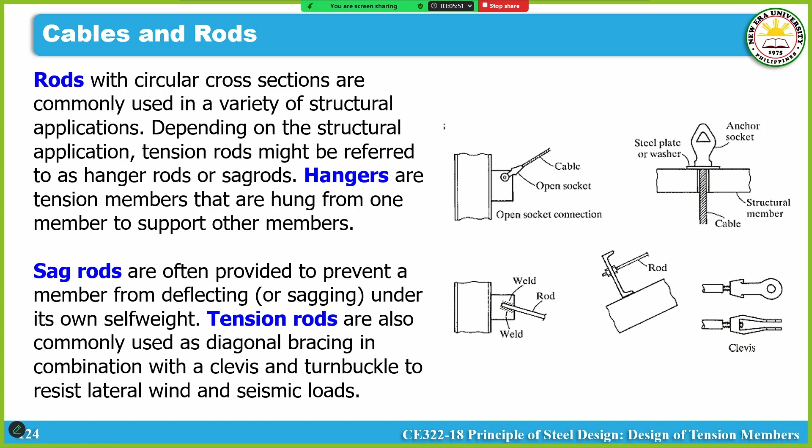And yung mga tension rods naman, usually in structures as additional diagonal bracing to provide additional lateral stiffness. Yan yung purpose ng mga tension rods. Okay? So paano ba siya di-design? As per code, design nominal capacity mo or strength.

Let me clarify. This is a nominal capacity: R sub n is equal to F sub n times A sub b. Wherein yung A sub b mo, this is just simply the area of your rods or cables. Gusto ko lang i-emphasize yung area na tinutukoy dito is the unthreaded area.

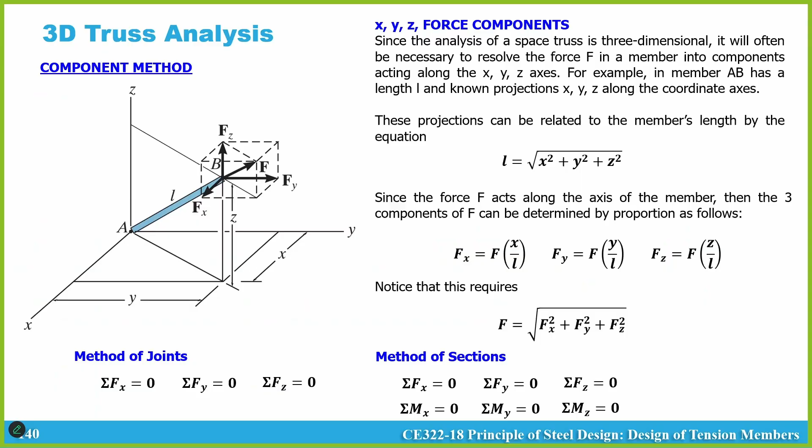Okay, last problem natin, problem number 6. Siguro dito I would simply use the direct calculation na lang kasi straightforward naman to. Although hindi siya truss member, the formula for the degree of indeterminacy applicable pa rin dito. So for 3D case, for trusses, we have DI equals r plus m minus 3j. So yan yung equation kapag 3D ka na. So might as well check if nasa determinate structure pa rin tayo. So DI natin kapag 3D is equal to r plus m minus 3j.

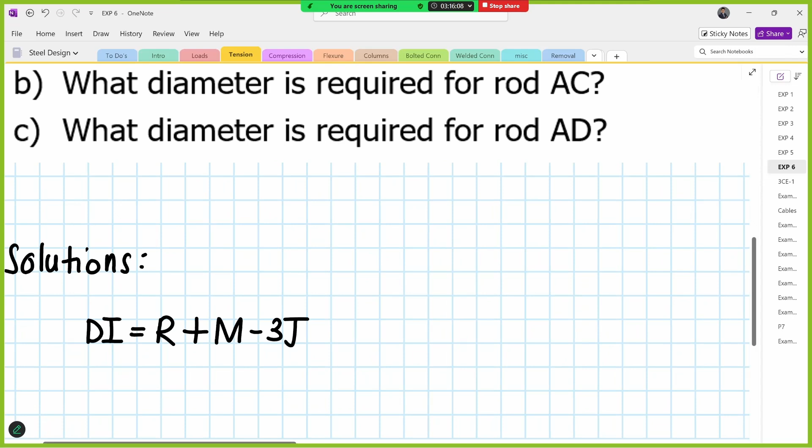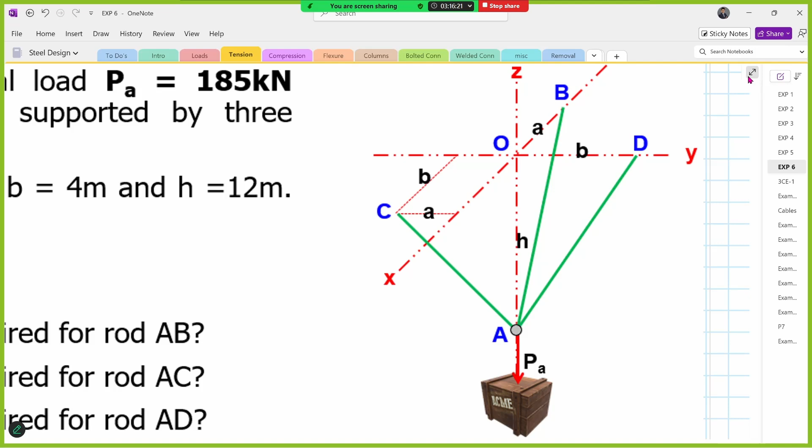And going back dun sa problem, we have three members, tapos meron kang applied load. So reaction muna tayo, ang reaction sa support. I think everyone would agree na kung meron kang tension rod na ganyan, most likely tatlo yan. We have C sub Y kasi parallel sa y-axis. Tapos possibly meron ka ditong C sub X kasi parallel sa x-axis. Tapos meron kang pataas, which is C sub Z.

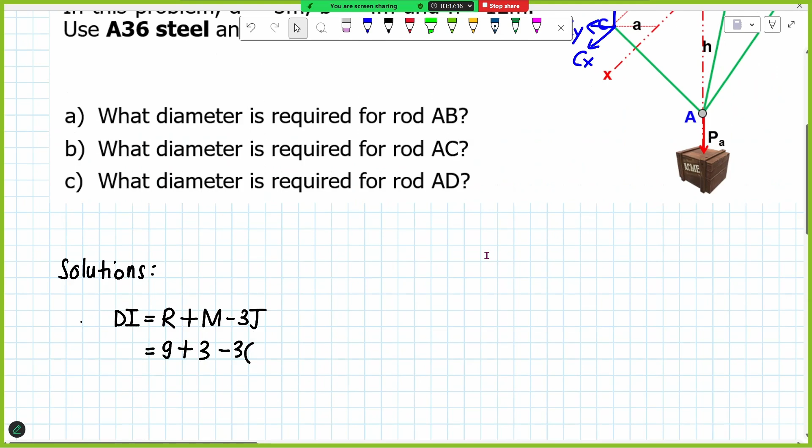So ibig sabihin, each support would have three reactions. So tatlong support to, 3 times 3, 9 reactions. Number of members, we have 3, minus 3 times yung number of joints. So dito yung number of joints mo is 1, 2, 3, and 4. So it would give you 9 plus 3, 12, minus 3 times 4, 12. So yung degree of indeterminacy mo, although cables to guys, we could still use this kasi ma-activate naman lahat ng tension rod mo, wala namang zero force member. So this is 0, meaning we have a determinate system.

Okay, sige. Now, okay na tayo dito. We could now use the component method. So using component method.

By the way, determinate, ibig sabihin ang conclusion natin dito, yung summation forces vertical, summation forces horizontal, or summation moment, basically pang 2D to. Pero yun nga, yung 3 equations of equilibrium kung 2D ka, applicable yan. So dito medyo mas madami tayo ng equation.

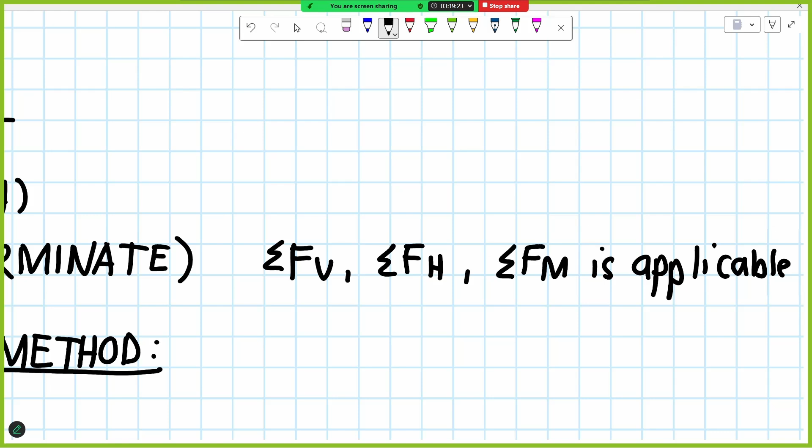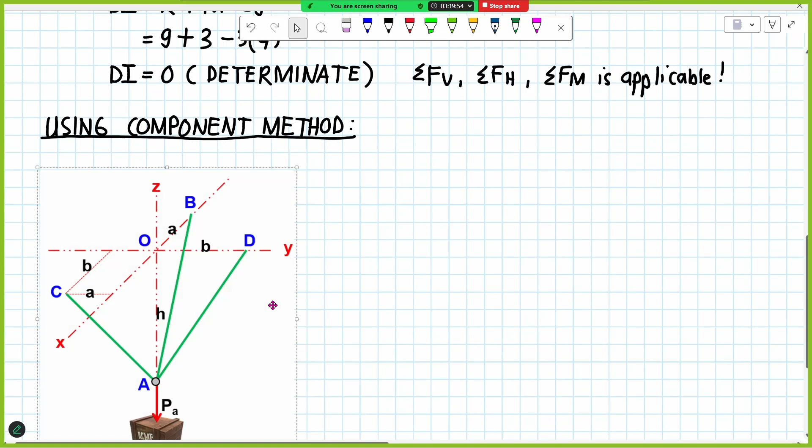Now, let's go back dun sa ating figure. Siguro kunin ko na lang din. Now, dito sa figure natin, i-define natin yung direction ng ating reaction in terms of vertical direction. Obviously, alam natin na yung direction ng ating mga reaction is upward. Halimbawa, C sub z, kasi dapat yun yung mag-resist dun sa tension load na going downward. So meron kang B sub z and meron ka ring upward na reaction sa point D. Yan yung expected natin na direction.

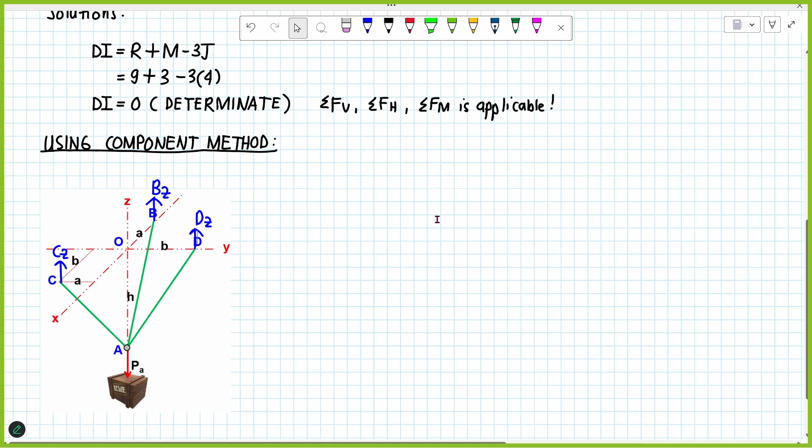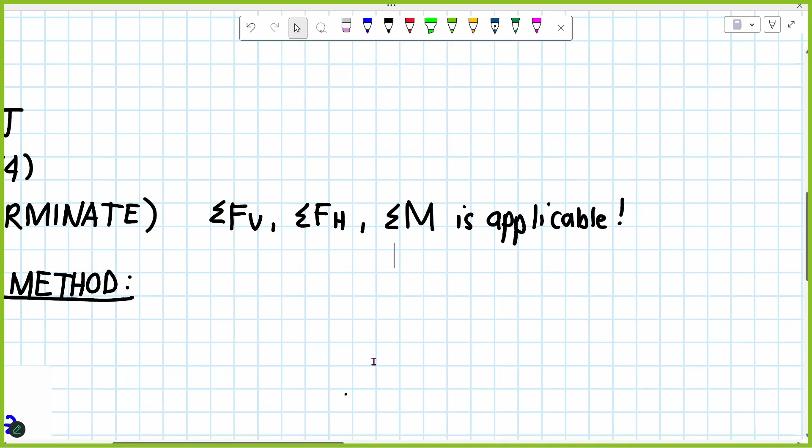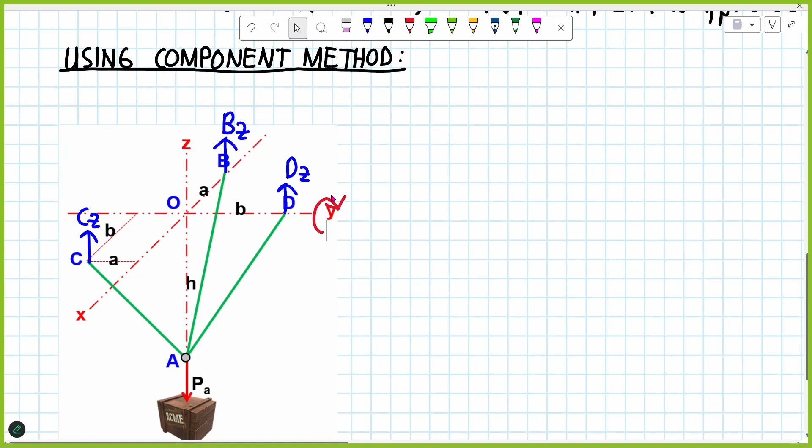Now, assuming na we could use the summation moment. By the way, mali pala to. Summation force horizontal, summation moment lang. So assuming na we use one of the equations available and we take advantage ng summation moment, kahit saan tayo mag-summation moment dyan, dapat it's equal to 0. Pero meron kasing rules in terms of doing summation moment. Usually, doon ka mag-take sa axis or imaginary axis na kung saan meron kang ma-eliminate. So, say for example, we take a summation moment at y-axis. Ano ba yung kakalabas na mga forces?

So, taking moment at y-axis, assuming na clockwise is positive. Pag nag-summation moment ka at y-axis looking at this figure, lahat ng forces na passing through that axis would be eliminated. Bakit? Kasi yung moment arm mo is 0. So ito yung y-axis natin. If this is our y-axis and nag-take nga tayo dyan ng moment, sino-sino yung mga forces na mai-eliminate?

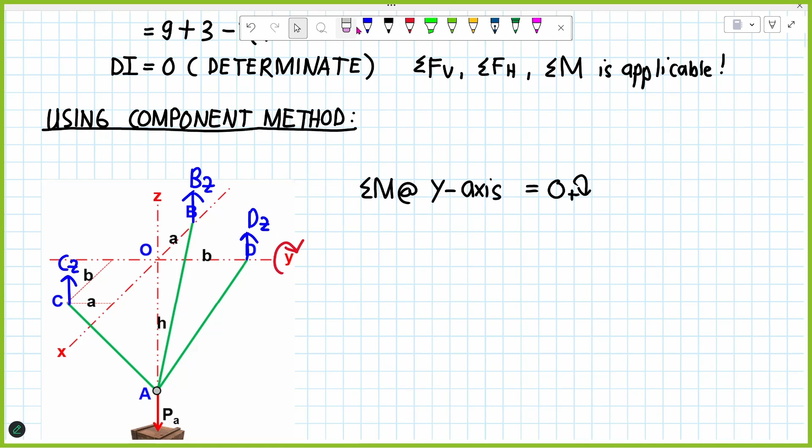By the way guys, pwede ko na ipakita yung mga reaction component ng ating mga forces. Like for example, itong reaction dito, this is C sub x, di ba? And katulad ng pinakita natin kanina, sabihin natin ito is C sub y. Nireflect lang muna natin itong dalawang direction na yan. Ngayon, pag nag-take tayo ng summation moment at y,

ang mga mai-eliminate na forces is una, yung forces na nagpa-pass through mismo dyan sa axis na yan. In this case, yung D sub z, nag-pass through siya dun sa axis. And then si load P. Nag-pass through siya, so walang moment arm. Another forces na mai-eliminate is itong dalawang forces on plane x and y. Bakit?

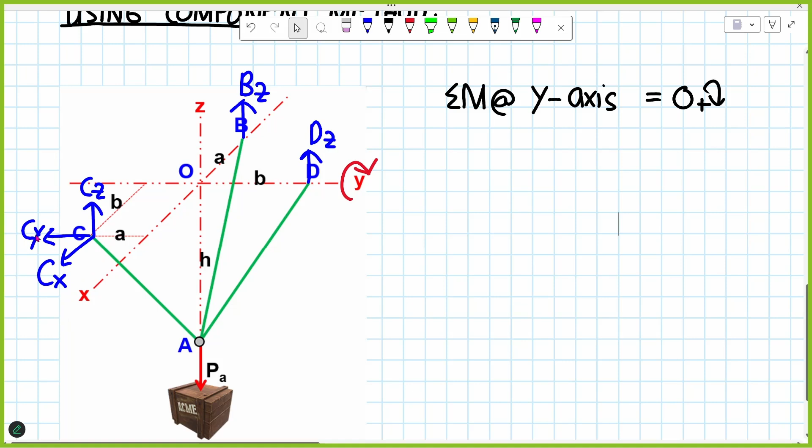Kung summation moment at this axis, itong C sub y, may effect ba siya doon? Wala, kasi summation moment at this axis. Similarly, itong C sub x, in terms of summation moment at y, meron ba siyang effect doon? Wala rin. So ibig sabihin, itong mga forces na to would be eliminated. Kaya pinakita ko kanina yung tatlong reaction lang kasi doon lang tayo magpo-focus. Even on this support, yung B sub y and B sub x, lahat yun walang effect on the calculation of moment at y.

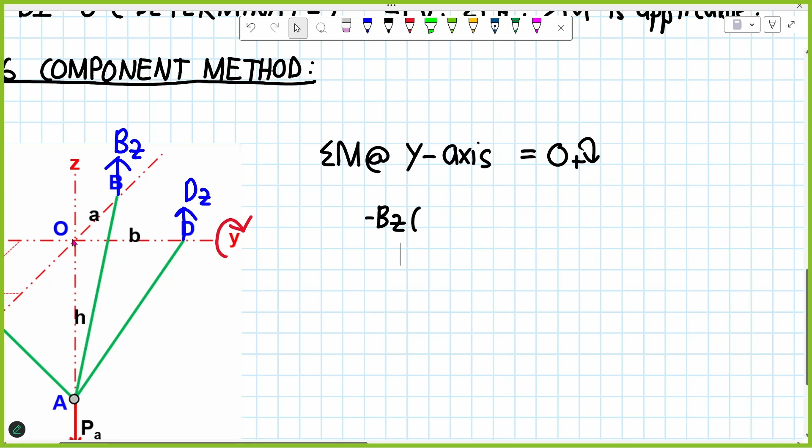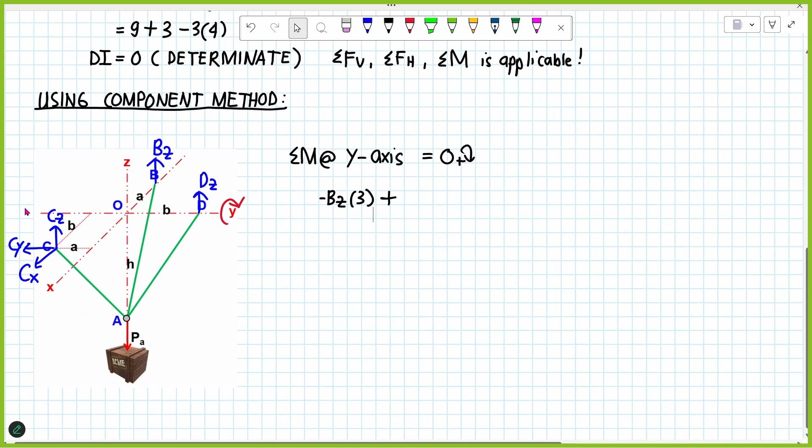So plugging in yung mga given. Sabi natin meron tayong B sub z. Pag ganun yung ikot niya, against the assumed positive direction, so negative. So we would have negative B sub z. Moment arm niya from y-axis is itong distance A, and that is 3 meters. Plus, ang matitira is itong C sub z na reaction, this one is clockwise, and ang moment arm mo is yung distance B, equal to 4 meters.

So we have C sub z times yung moment arm niya na 4, equals 0. We could simplify this one further. Lipat natin yung B sub z sa kabila, so magiging 3B sub z, and our equation would be C sub z equals 3 over 4 B sub z. So we could simplify this one as 0.75.

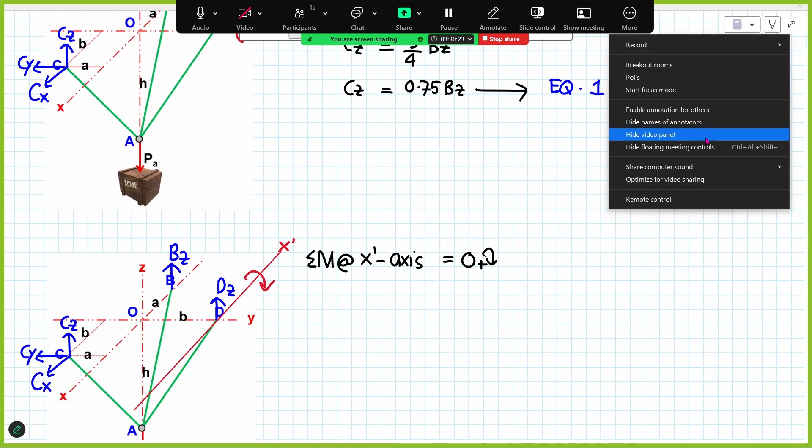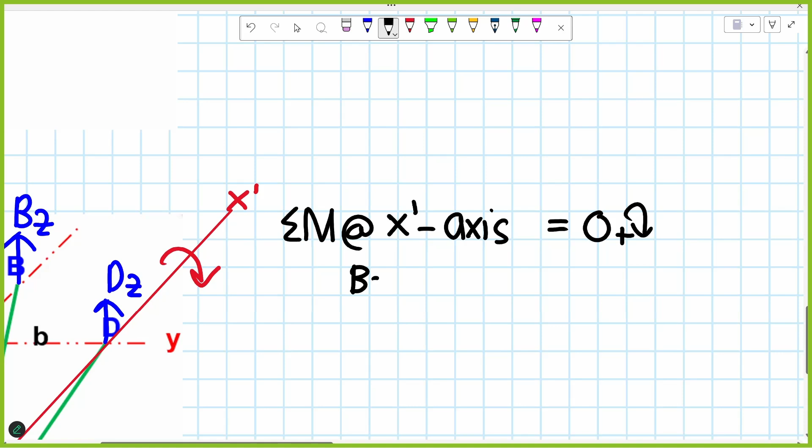So we could say na we have B sub z, moment arm is B, which is 4 meters. So I think positive. Yeah, positive. So B sub z times its moment arm, 4 meters. And then we have the C sub z. Ang direction niya is ganun din, clockwise, so positive. Times its moment arm. Yung moment arm natin, on this case, is distance A plus distance B. Moment arm ni C sub z dun sa imaginary x axis. So that is 3 plus 4. A plus B, 3 plus 4.

And lastly, yung load, P sub A. Si P sub A, ang effect niya is counterclockwise, so that would be negative. I think this one is negative 185. Negative 185, and yung moment arm niya would be distance B, which is 4 meters. 4 meters. We would have 0. Now, simplify. We would have 4 B sub z plus 7 C sub z.

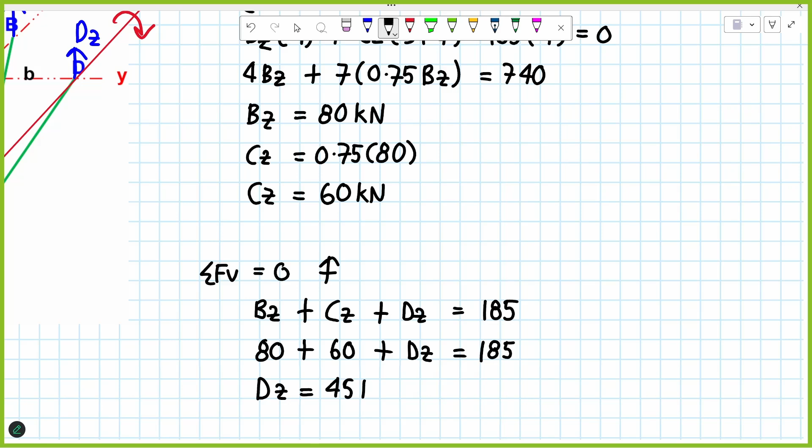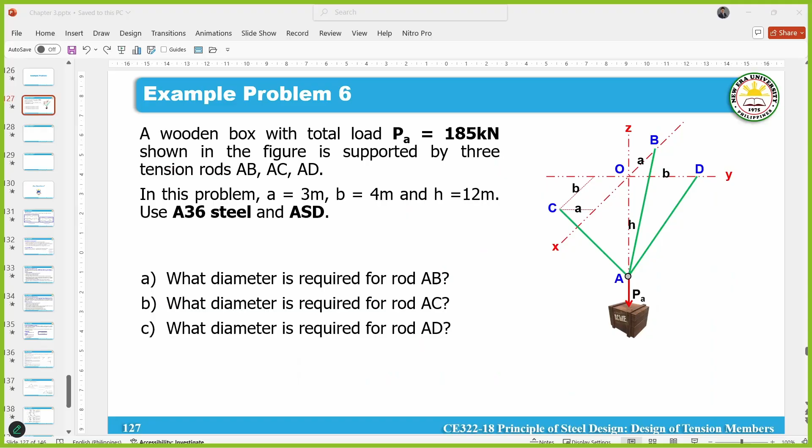Okay, meron tayong Z component ng ating mga reaction dyan. I think everyone would agree, if meron kang certain component nung reaction dyan, which is also related to the applied load doon sa mga chord na yon, we could use yung formula na present natin kanina on 3D analysis. Halimbawa, F sub z is equals to F times yung z distance over L. I-plug in natin yung na-calculate natin kanina, yung mga z component, makukuha natin yung actual force acting on that member. As simple as that.

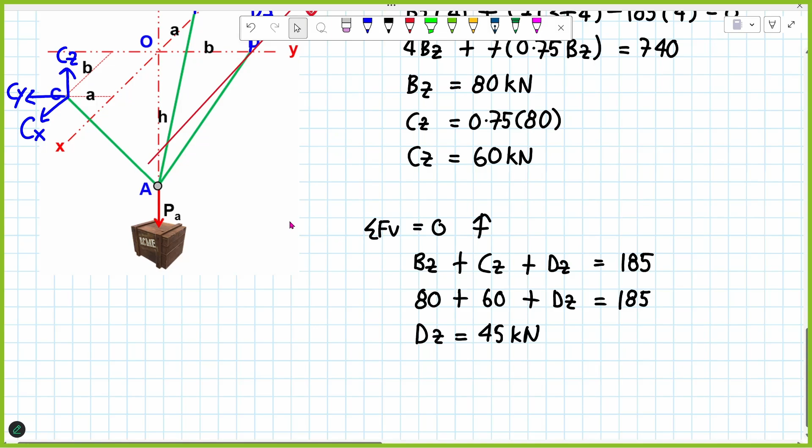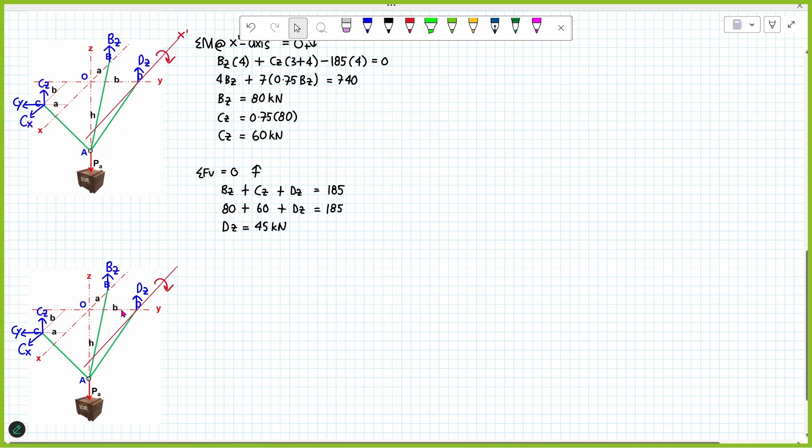Unfortunately, wala pa tayong value ng z distance tapos yung L. So yun yung kailangan natin i-define. Well, yung L ng isang member is simply square root of x squared plus y squared plus z squared. So yun muna yung next nating kailangang i-calculate. So kunin ko to ulit, itong figure na to, and i-copy natin yan. I-delete ko na tong dalawa na to kasi medyo panggulo na siya.

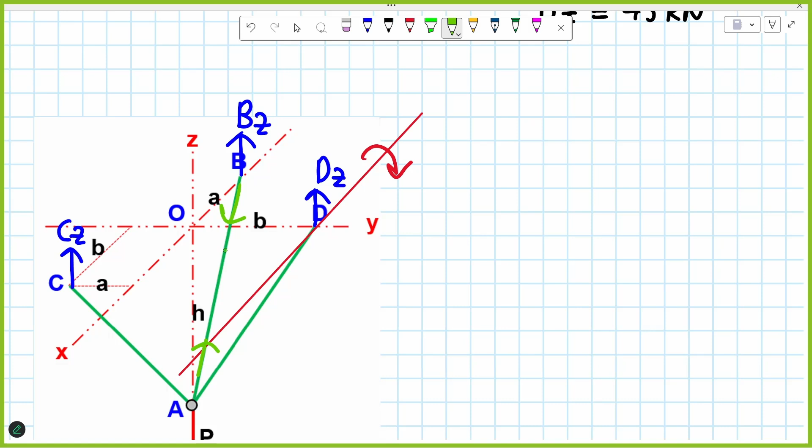So basically kung yan yung reaction, since this is in tension, this one is our T sub AB, AB kasi point A going to B. And this one is also T sub AB. Same dito, this one would be T sub AD. This one ganun din, in tension T sub AD. Similarly dito, T sub AC and this one, T sub AC.

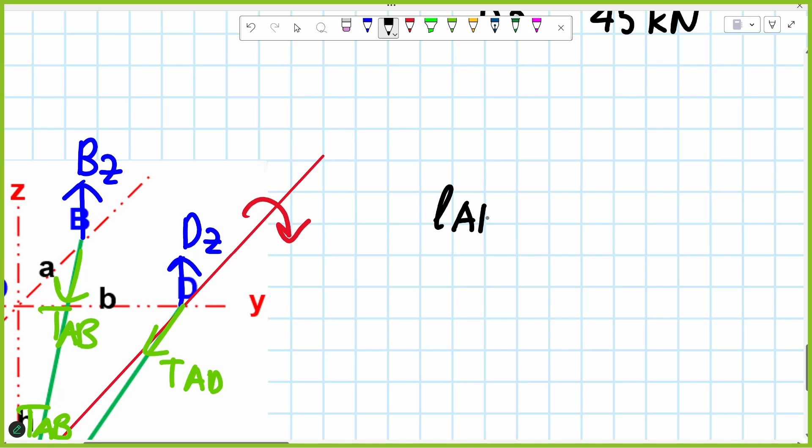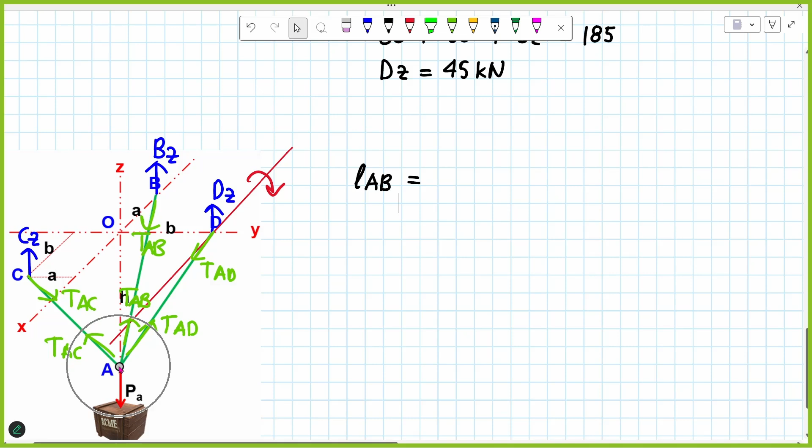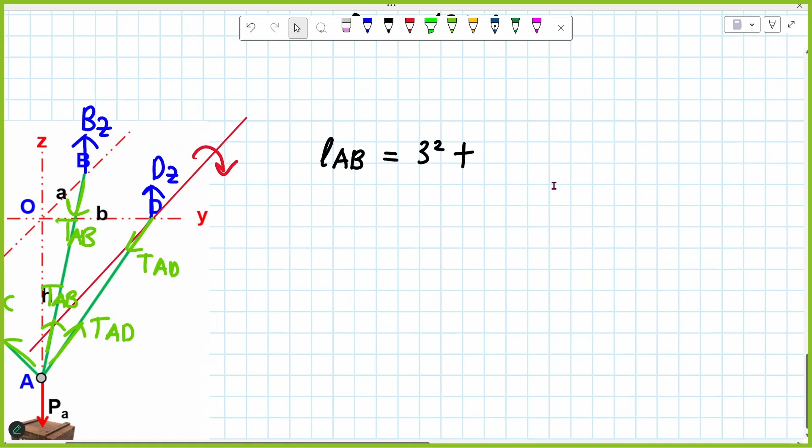So let's try to calculate muna using component method yung mga lengths natin. Unahin natin yung length AB. If we refer dun sa figure natin, our length AB is equal to the square root of, ano ba yung x and y component niya? For distance AB, from its tail going to head, yung x distance ko is A, and A is 3, so 3 squared. Plus yung y distance niya, from tail to head, is 0, kasi parallel siya sa x axis. So wala siyang distance at y.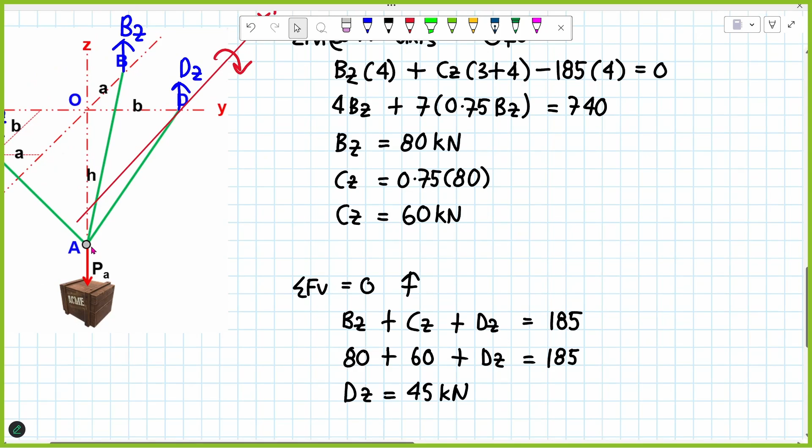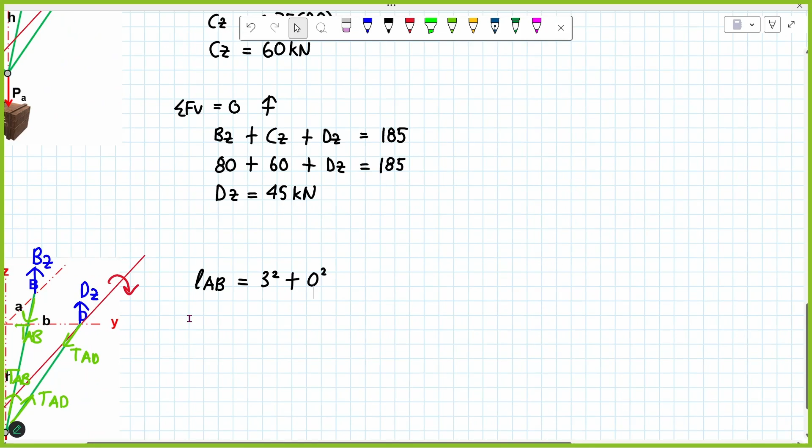Similarly, yung height niya from head to tail is yung height h, itong vertical distance, and h is equal to 12 meters. So we could now calculate yung length AB, plus 12 squared, square root. Similarly, i-copy paste ko na lang to kasi meron pa tayong dalawang distance na kailangan i-calculate, para mabilis. So we have length AC muna.

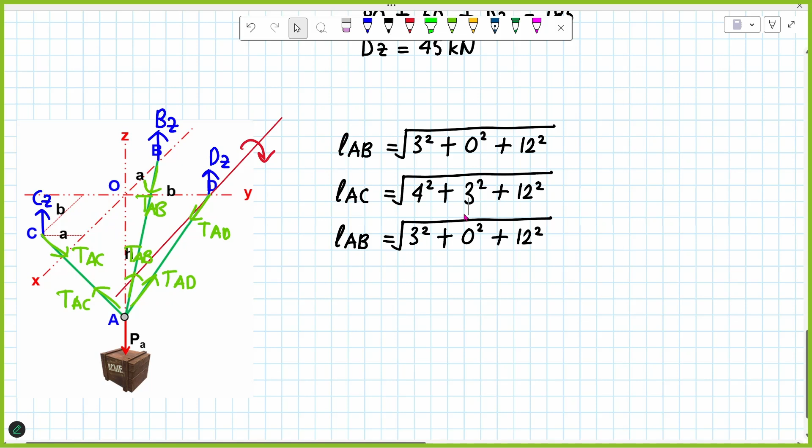From this point to this point, ano ba yung distance x niya? Ito kasi yung x axis, so yung x distance niya is distance b, and distance b is 4 meters. So this one would be 4 squared. Yung y distance niya from point A to point C is distance A, which is 3 meters, so 3 squared. Yung height niya, wala naman nagbago, yung z component is h din, so 12 squared. And lastly, yung length AD, makakalculate natin yan.

The x distance from this point to this point is 0, since we pulled on the y-axis. So the y distance from this point to point D is distance B, which is 4 meters. Similarly for the Z distance, it's distance H, so 12 squared. Now we have values for our lengths.

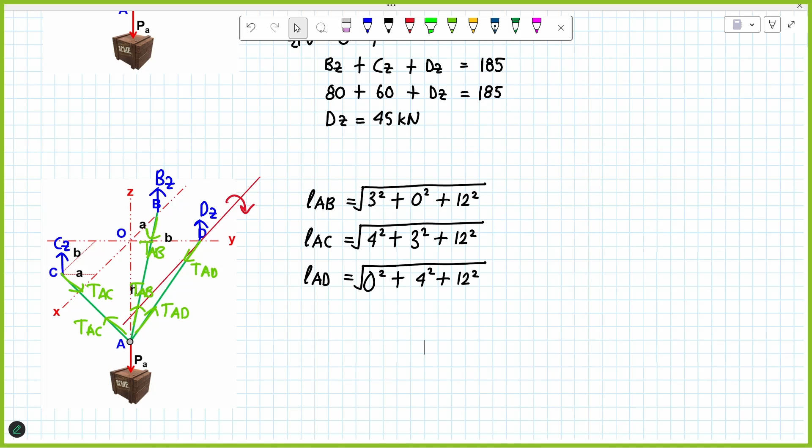Now, following the component method concept, F sub Z is equal to F times the Z distance over length. Let's use that component method equation as our basis.

Using this equation, let's plug in our given values. If we focus on B sub Z, let's plug in 80 here. So B sub Z equals... let me show this so it's clearer to understand.

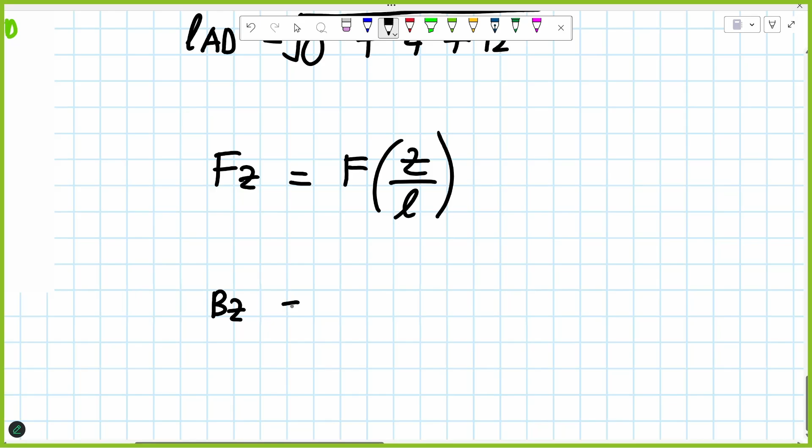This is the counterpart: F sub Z is equal to the force acting on that rod, which is T sub AB. T sub AB should be equal to the Z distance, or the height H, which is simply 12 meters, divided by the distance L, AB. Let's plug that into the equation.

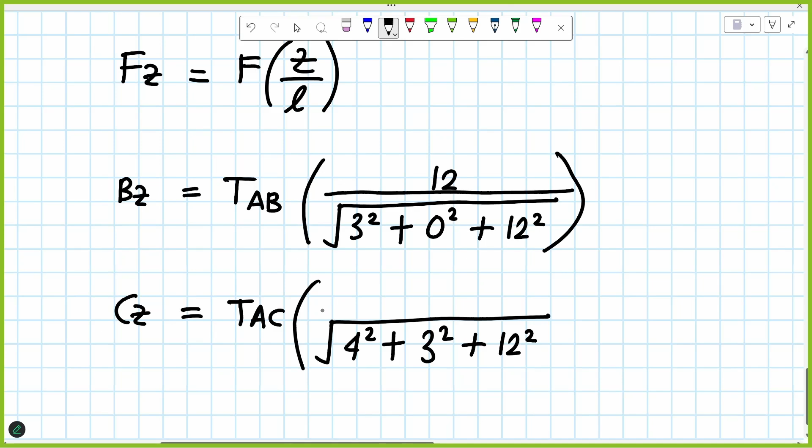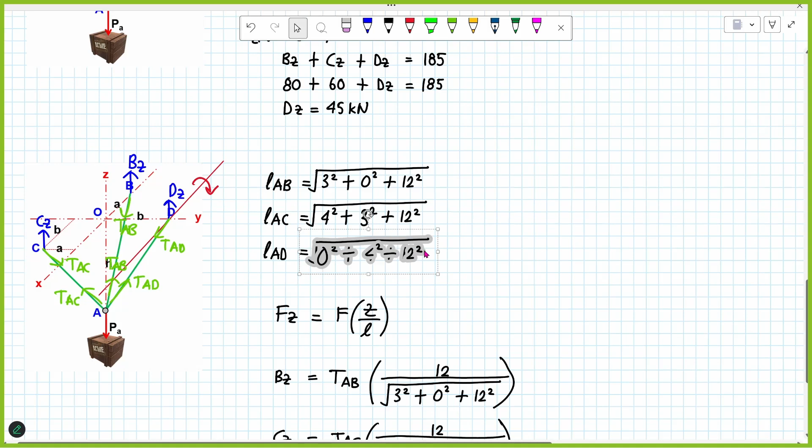And lastly, the D sub Z equation. The counterpart force there is force AD, based on the figure and logic we discussed earlier. So that is tension force AD, and similarly the L, that's this equation. The Z distance is the same, 12. So we now have our three sets of equations.

Now we can simplify this further by substituting the value of these reaction components. For example, for B sub Z, that is equal to 80. So now it becomes 80 equals this equation. You can solve this for the value of T sub AB.

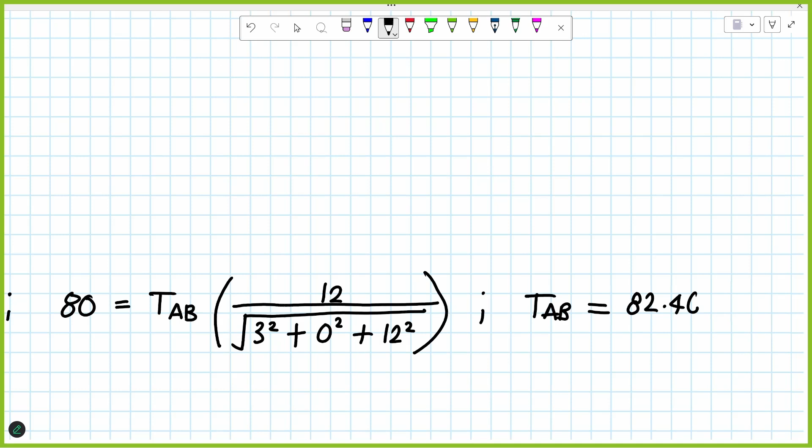T sub AB equals 82.46211. And similarly for C sub Z, that is 60.

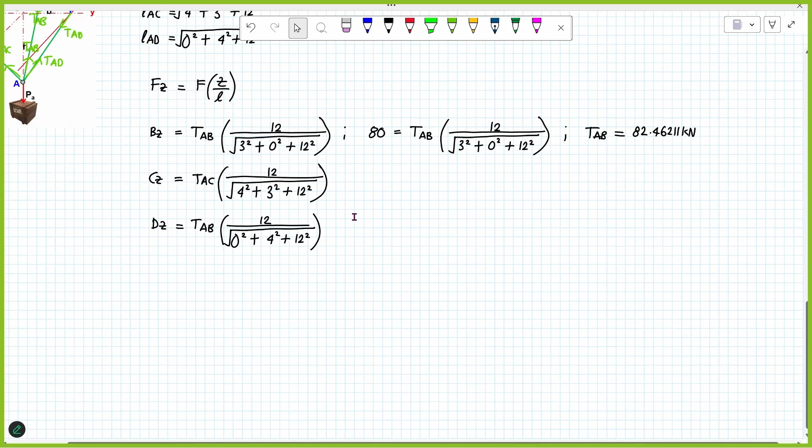So 60 equals this equation, giving us the value of tension AC equal to 65.

And lastly, our D sub Z, which is 45. Equating this to the equation, you would have tension AD equal to 47.43417.

Now we already have the actual load acting on the tension rod. We could now design our tension rod, which is this one, so the design strength.

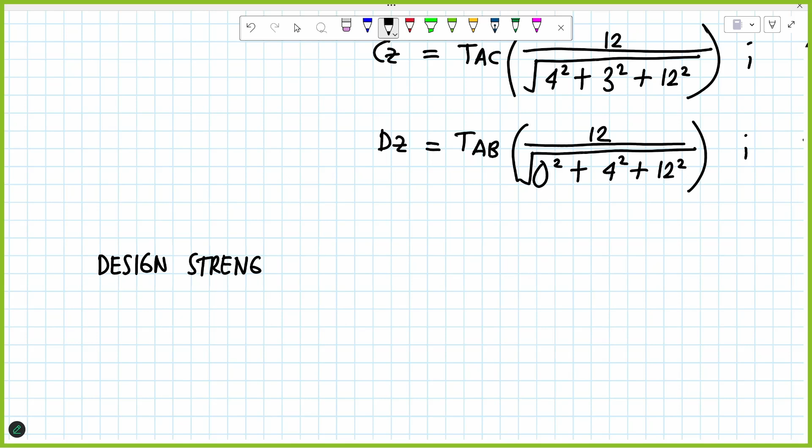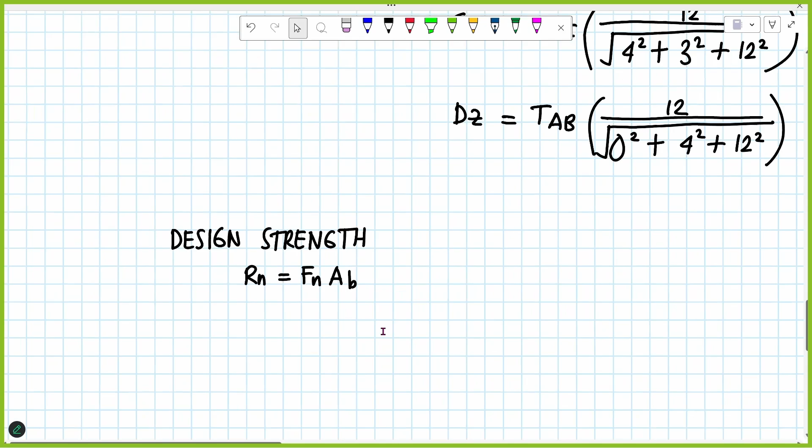Now, the design strength would start with the nominal capacity, R sub n, which per the code is F sub n multiplied by the area of the unthreaded bolt. Now, wait, actually it seems design strength isn't what we need here, since it appears already specified in the problem.

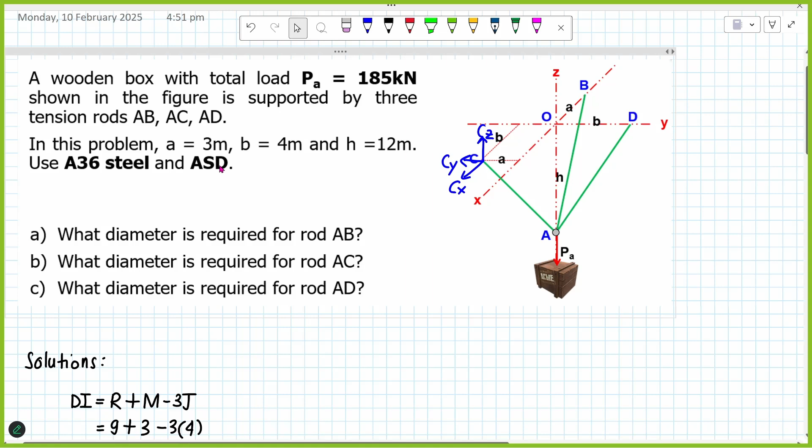ASD pala yung pinapagamit, no? ASD, so allowable strength. Okay, tapos diameter required for rod AB. So design problem tayo.

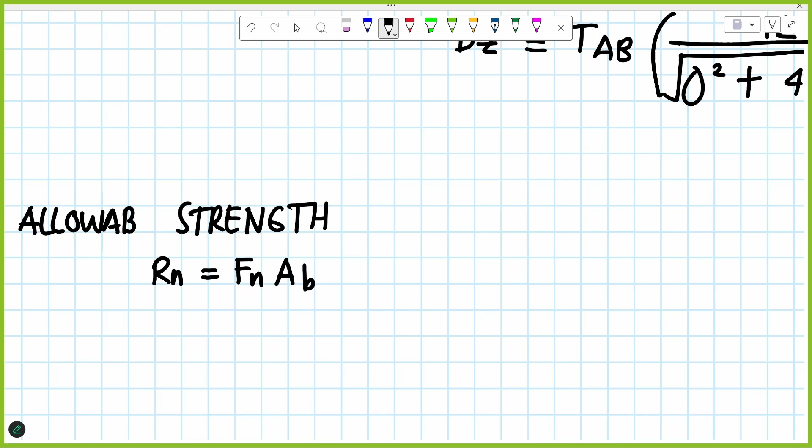Ipa-plug in natin yung mga values. Ipapalitan ko na lang since ASD tayo, so allowable strength tayo. And the formula is the same, no? R sub n is ganito. Tapos i-expound pa natin to further. We could say na R sub A for ASD is equal to R sub n, yung nominal, divided by omega sub t.

Now, going back doon sa equation, yung R sub n kasi, ito rin yon, so might as well copy dito. Yan din yung R sub n, di ba? So over omega sub t.

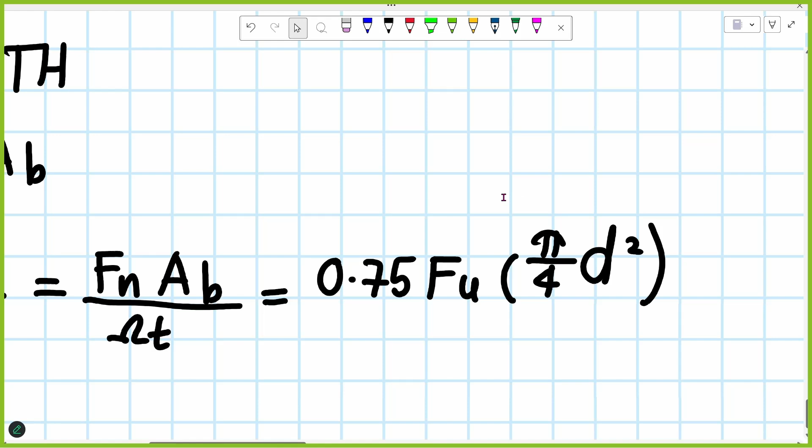Tapos pwede pa natin i-expound further to kasi sabi natin sa code, yung F sub n natin, 0.75 FU, as per the code for design of rods. F sub u. Similarly, itong area, unthreaded area, area ng circle, pi over 4 d squared. Tapos lastly, yung omega sub t for the denominator.

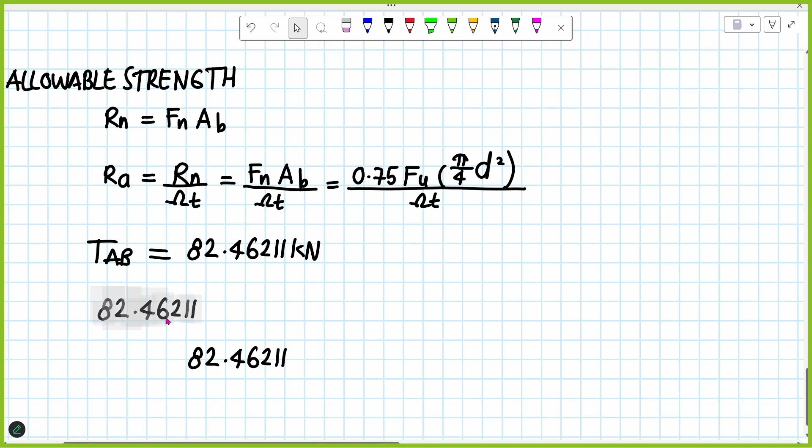So meron na tayong formula na gagamitin para makalkula natin yung ating diameter. Ngayon, itong RA na to, yung tinatawag na allowable strength, nakalimit lang yan. Pwede natin i-plug in, since due to load to, yung nakalkula natin dito, halimbawa for this one, if T sub AB is equal to 82.46211 kilonewton, pwede natin i-plug in itong values na to dun sa equation. So ang mangyayari ngayon, ito yung kalalabasan. Ito yung equation natin, substitute natin sa RA, tapos yung rest, ito. So parang binalik lang natin para magkaroon tayo ng diameter.

So we would have 0.75, yung F sub u natin A36, that is 400. 400 times pi over 4, times diameter of bar, which is unknown. Sabihin natin diameter of bar AB para mas malinaw, squared, divided by 1,000.

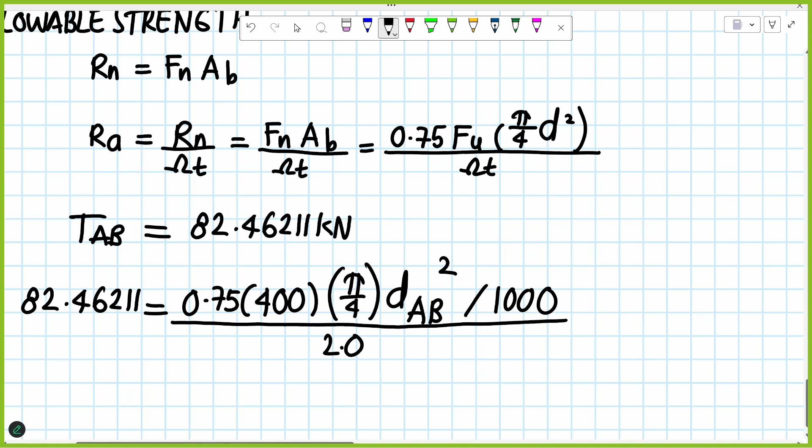Ngayon, i-divide natin to by the omega sub t for design of cables. Similar lang yan with design of rupture, or block shear mode of failure. So we would have the diameter of AB, which is equal to diameter AB. Paki-shift solve nga ito.

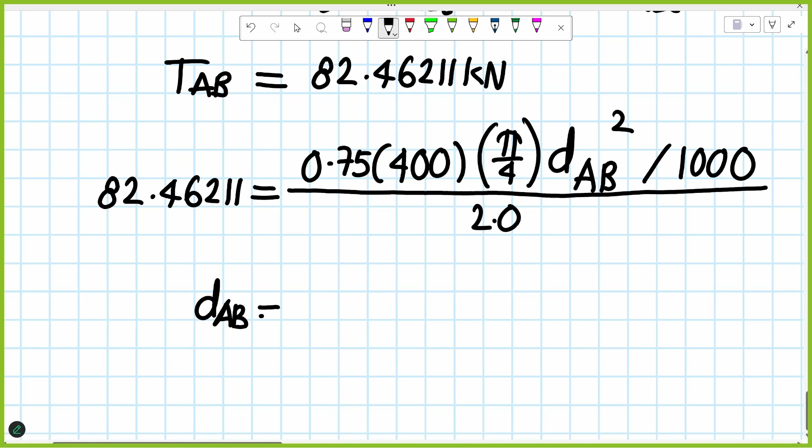Ilan to? Okay, ilan to? 26.45. For 6 po, sir. Okay, 46, 46 po.

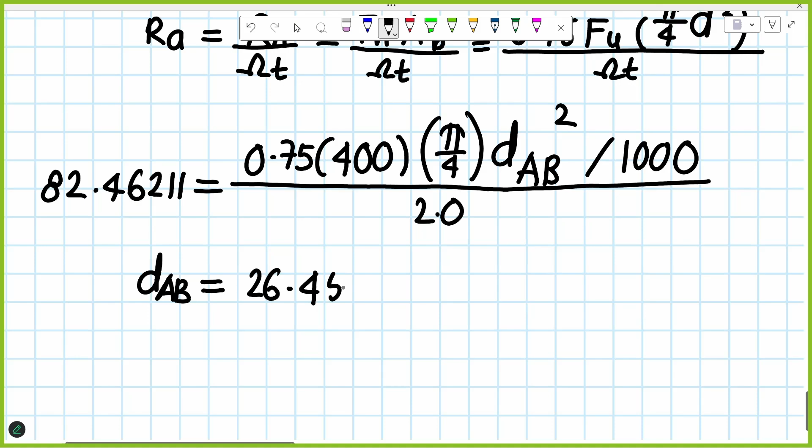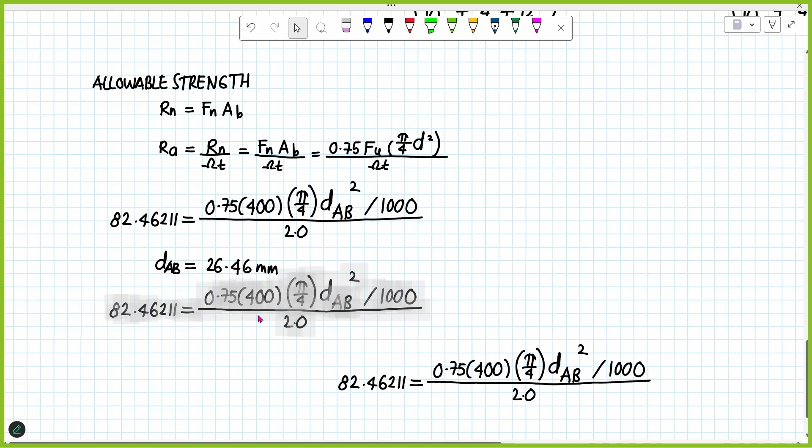Similarly, mabilis na lang to, para dun sa dalawang tension rod, para magkaroon ka ng diameter doon. Yan mo lang, ibalik mo lang ulit yung load niya. Which is, ito, kunin na natin, AC and AB. Teka lang, para na ulit to. This one is AD, hindi siya AB.

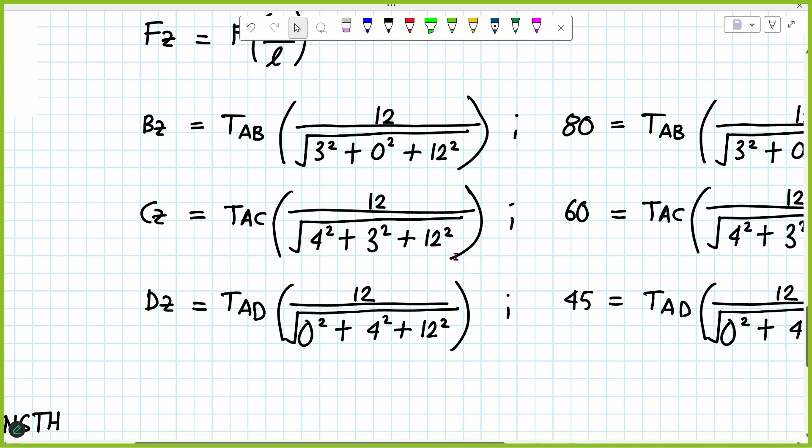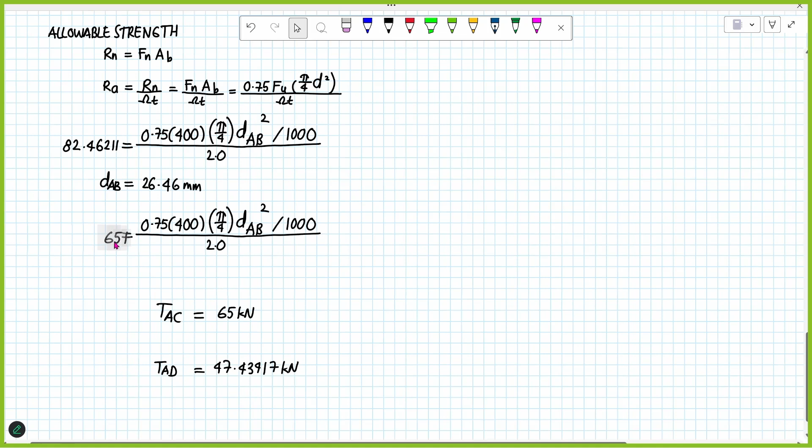So this one is tension AC, so diameter AC. Ano yung value nito for the diameter AC? So ilan to? 23.48909, 23.49 kumbaga. Tama ba? Opo. Okay, and lastly.

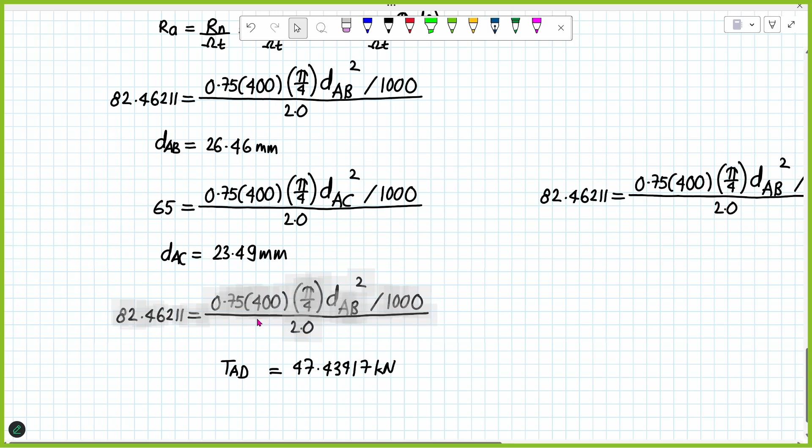Sige, tanggalin natin to, palitan natin ang forces. Tapos this would be diameter AD. So ilan to? Diameter AD. 20.07 millimeter.

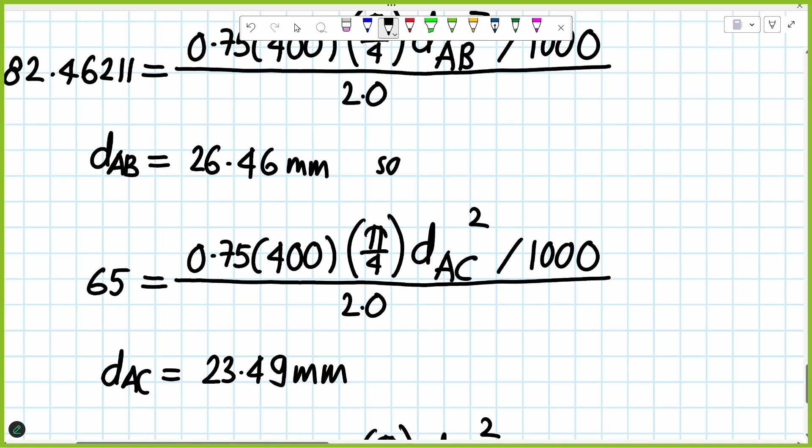So ito na yung mga sagot natin. Pero i-ano ko lang, pag sa board exam, ito yung sagot nyo. Pero kung mag-design kayo sa plano, hindi ito ilalagay nyo. Ang ilalagay nyo, so for example, for diameter AB, sobrahan mo dapat. Kasi wala ka namang bibiling diameter na ganito, eh. Available, di ba? So sabihin mo, say use 30 millimeter diameter.

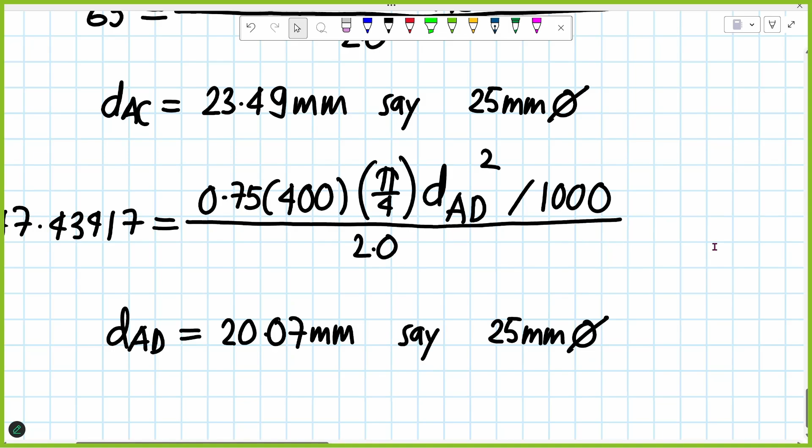Yung kasunod na value. So dito, siguro pwede mo sabihin na say 25 millimeter diameter. Tapos lastly dito, since may konting butal, say 25 millimeter diameter. So ganyan, i-round up mo. So ganyan ang gagawin mo.

Pero kung ako yung tatanungin nyo pa, hindi pa ito yung gagawin ko. Ano pa yung gagawin ko? Tatanggalin ko to. Gagawin kong 30 na lahat ng aking diameter, para isang bilihan na lang. At kumbaga pagdating sa drawing, ito yung tinatawag na idiot friendly. Idiot friendly yung kung sino man yung magko-construct nung structure ko, kahit ipagpalit-palit nila yung mga sukat ng mga rods ko, okay lang kasi pare-parehas naman eh. So yun, ganun mag-design.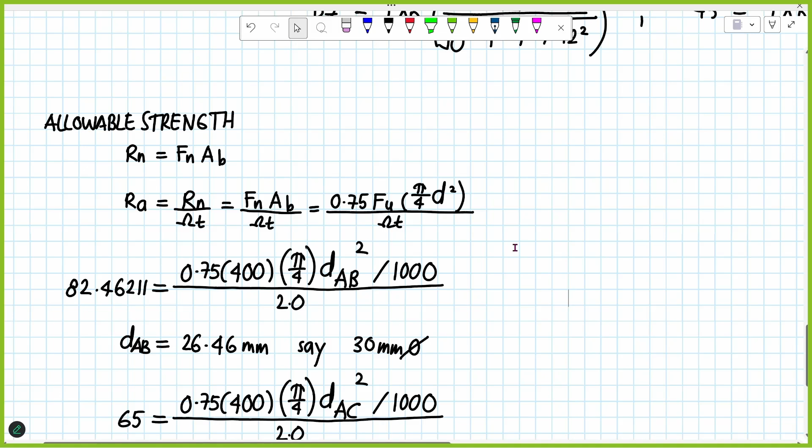So ito na yung final natin. Using 3D analysis, you're able to calculate yung mga forces, then from forces, yung required strength, pinag-in natin doon sa left hand side ng equation. Then magkakaroon tayo ng unknown na parameter, which is ang diameter. And from that, you would have the dimension, round up mo lang kasi nga dapat mas mataas.

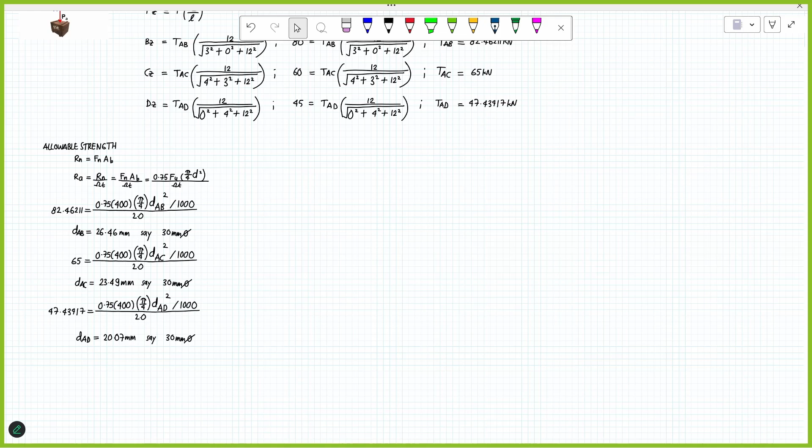Any question or clarification bago tayo mag-end of discussion? Wala po.